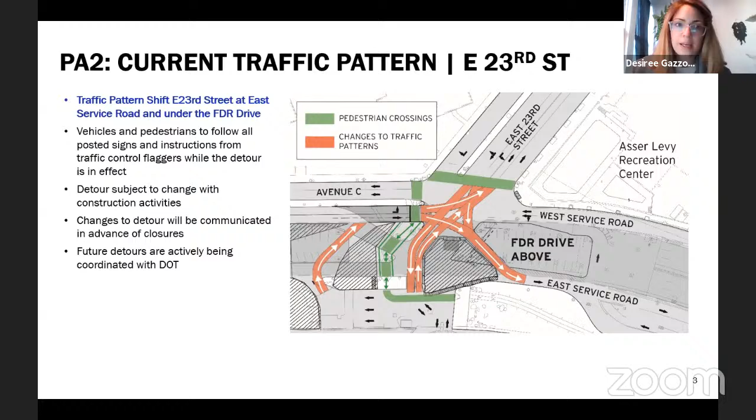So first, we just wanted to remind everybody, as of last week, the traffic pattern at East 23rd Street and Avenue C under the FDR Drive shifted. So the work has changed a little bit. I don't know if you've had a chance to drive or ride or walk down there, but again, please heed all signage that's there and the traffic folks that are helping assist pedestrians and vehicles. This will be in effect for several weeks, and then we will shift back to working on the south side of the intersection, and that will be about April 22nd.

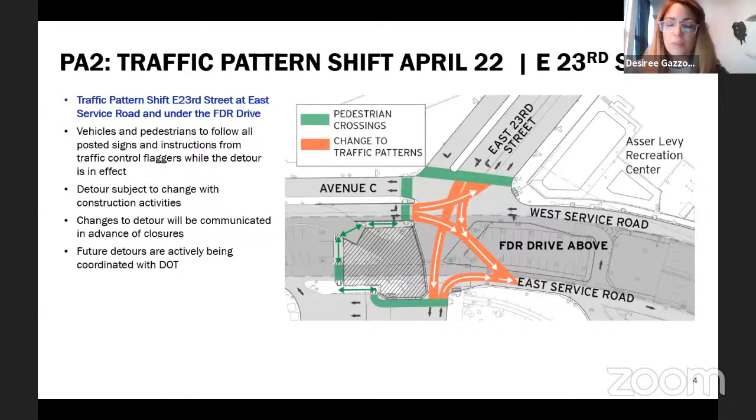We had an advisory go out that I believe said the shift was going to happen about a week earlier. New schedule discussions have provided us more information, and it looks like that shift will happen not until the week of April 22nd. Again, please reach out with any specific questions, but basically we just hope that everyone follows the signage in this intersection. It is a very complicated intersection to begin with, and the construction makes it a little bit more difficult. But we are coordinating with DOT on the signage. We have the traffic folks there to help pedestrians and vehicles. We ask that everyone, bikers, bicyclists, and vehicular traffic folks, pay attention to the folks trying to help move the traffic along.

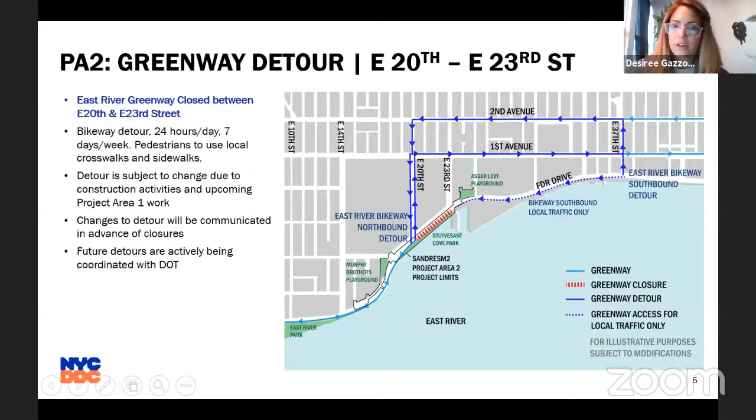So currently, bicyclists that are using, or when that Avenue C access comes online, folks can use Avenue C, connect on the Greenway here at this area, just at 18th Street, just before getting onto the detour access at 20th Street - that right Avenue C loop. So the question that had come up, and we understand there was a letter about it, was to look at this area under the FDR Drive between East 18th Street and East 23rd Street, which we have been doing in coordination with our DDC folks, DOT, and the contractor.

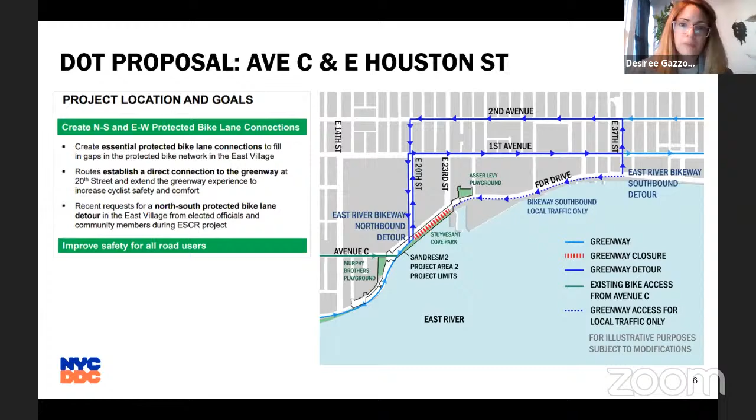Once the pile driving begins, which it is beginning this week, in the Solar One area, that area under the FDR Drive will also be heavily used for staging of equipment and materials, and then Avenue C will be more heavily used for the equipment for construction.

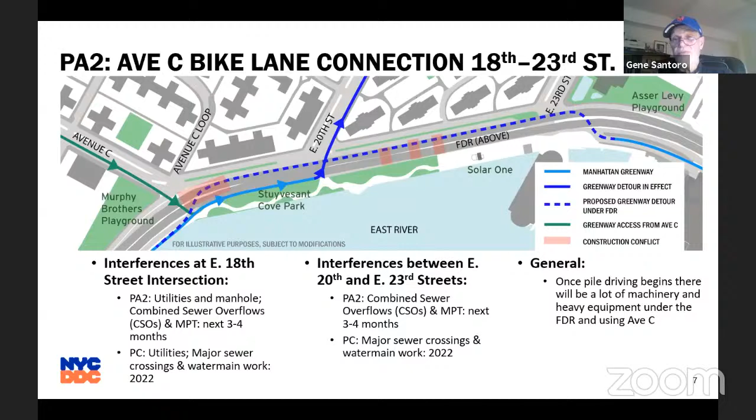I have a follow-up question about the transportation issue. I understand this map and what you're saying. I'll reiterate one more time: for all your planning, what I see is people riding their bikes and jogging in the street and on the sidewalk up Avenue C in traffic. So for all your signage and plans, it's not working. That's all I have to say, because I'm not Sisyphus — I'm not going to keep rolling this stone up the hill. We'll see what the casualties are as the season starts to ramp up.

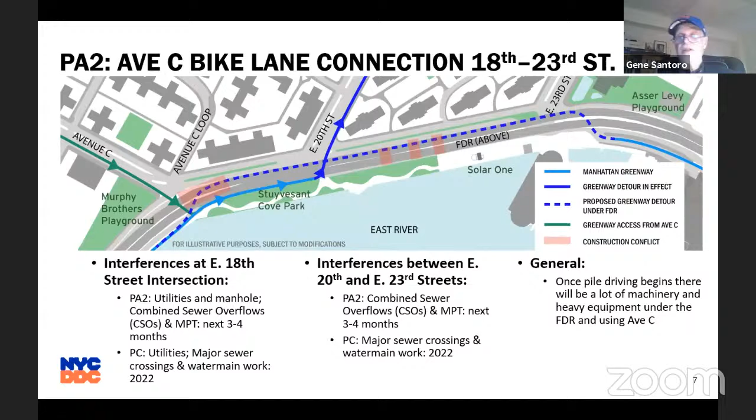Hey, Gene. Hi, Community Board 6. This is Jennifer Falk, I'm with the Union Square Partnership. Thank you for having us this evening. We know this has been a really difficult year for a lot of people, and we really appreciate the Community Board's time in hearing our agenda item this evening.

As more people are getting vaccinated and the weather's getting better, we're really looking forward to spring. I'm going to do a quick introduction, and then turn it over to my colleague, Ed Janoff, who will run through the presentation. I know I don't have to explain what a business improvement district is or who the Union Square Partnership is, but we've been around since 1976.

This particular project is the culmination of a robust amount of community outreach that we did in the 2018-2019 period. We reached out to over 1,000 stakeholders through large community forums, smaller pop-ups including in residential lobbies, and an online survey, and pulled together what we hope will be the framework for eventual project work that we do in the district.

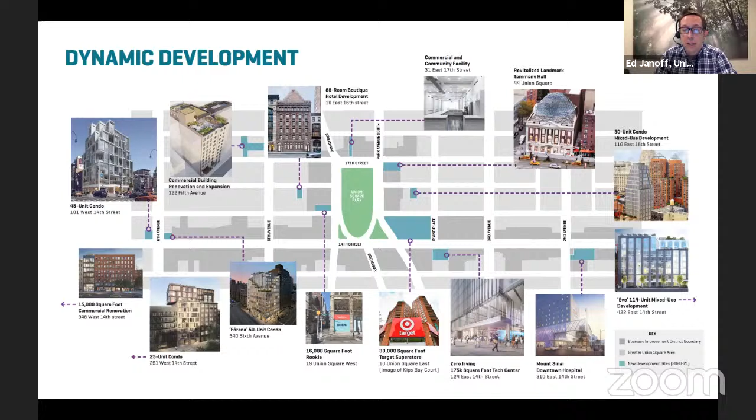All right, so I'm going to go through this material rather quickly. The vision plan is available on the website, but I'll leave plenty of time for questions at the end. This vision plan was started in 2018, at a time when the neighborhood was on a really strong positive trajectory in terms of foot traffic, mass transit use, and Citi Bike ridership nearly doubling year over year. That's a trajectory that, once COVID dissipates, we expect will continue, because there's a lot of strong investment coming into the neighborhood from the private sector — a Target coming into Zeckendorf Towers, the tech center opening next year, and a bunch of different mixed-use projects throughout the neighborhood.

The outreach portion of this vision plan development, as Jennifer said, was the most robust in the 40-year history of the partnership, with all kinds of different scales of engagement events — little pop-ups in the Green Market, in the lobbies of residential buildings, at subway stations, bus stops, etc.

We conducted a survey with thousands of different interactions to gather ideas about Union Square. I won't go through all the ideas, but open space and transportation were clearly two of the biggest things on people's minds.

We thought a lot about how Union Square as a neighborhood and public space is affected by the intersection of the pedestrianization, or future pedestrianization, of the Broadway corridor and the busway that was implemented—two DOT projects moving forward over the past few years.

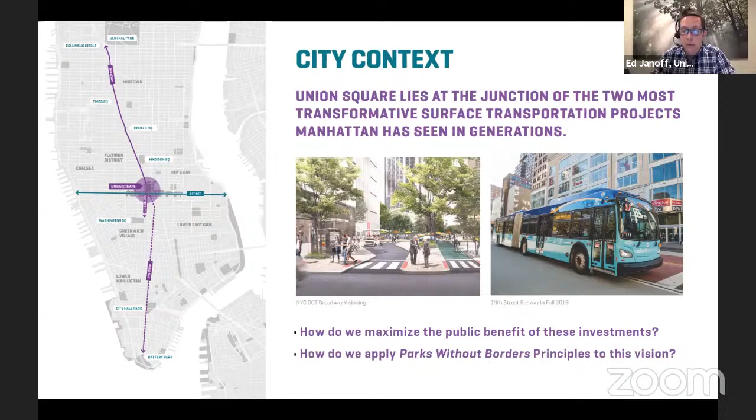We also thought a lot about the evolution of Union Square as a public space, from a gated oasis into more of an open square that is woven into the fabric of the neighborhood and integrated into daily use—starting from the Green Market to the DOT temporary work—and how we can advance that for the value and benefit of the neighborhood and the city.

So we created this vision statement, which is really about trying to make Union Square as a neighborhood and place as accessible and as inclusive as possible. There are a number of goals in the vision plan—soft goals that help drive the design thinking.

The design team, Marvel Architects, divided their ideas into five discrete projects to help organize our thinking in terms of funding and building.

The five projects are: Union Square West; the Broadway Gateway, where Broadway comes down into the square at 17th Street; 14th Street Boulevard, extending from First Avenue all the way to 6th Avenue; the Triangle Park at 4th Avenue and 14th Street, which from feedback seemed to need the most attention, along with the east side of the park in general; and fifth, the park in general, the central park area.

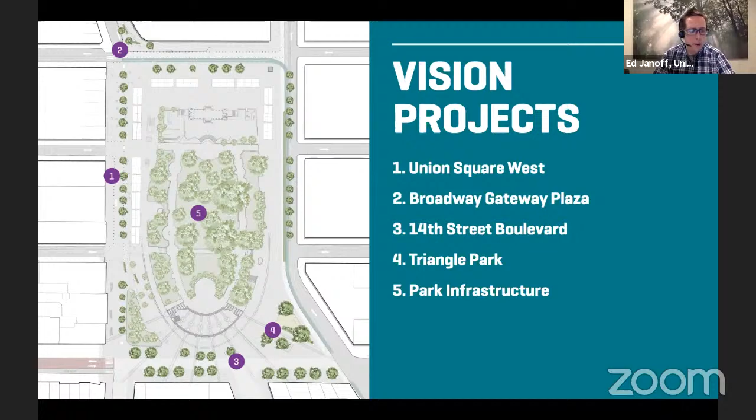Tali, I'm going to hand off to you. But basically, I'll start here to show you concepts that the design team created for these five different projects.

Basically, a lot of iterative, incremental changes have happened around the perimeter of the square over the last two to three decades. The overarching theme is: how can we make Union Square look and feel like one consistent, coherent space that is more friendly to pedestrians, more accessible, and supports bicycle and transit use?

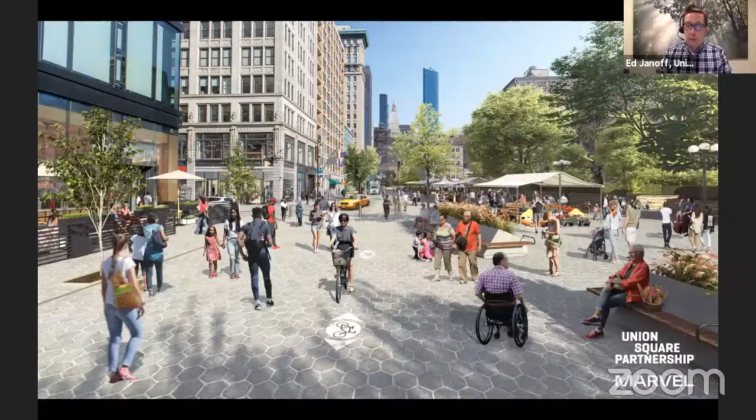Tali, are you with us? Hi, Ed, can you hear me? I'm having some technical difficulty. Yep, okay great—if it cuts out, please continue on.

Thank you, Ed, and thanks again to the committee for having us this evening. I'm going to quickly walk through a series of aspirational images that the design team created, which will illustrate the vision plan's five major projects.

As Ed mentioned, our goal is to create a unified design and palette that treats the space as an extension of Union Square Park. You can see in the after-image of Union Square West, there's a single paving material extended from Union Square Park out to the building edges.

Here the designers are showing hex pavers, which is a typical standard for New York City parks, but the idea is to create a seamless, unified look and feel. We believe this could be achieved using a variety of unified paving material.

Marvel designed these custom raised planters with seating components. There's also potential to include trees here—even though we may not be showing trees in all of the renders, we would like to increase the amount of trees where possible.

We're showing the Green Market extended down Union Square West with potentially new, unified canopies. There are retractable bollards to prevent through traffic, but these will allow emergency vehicles to access the buildings as needed.

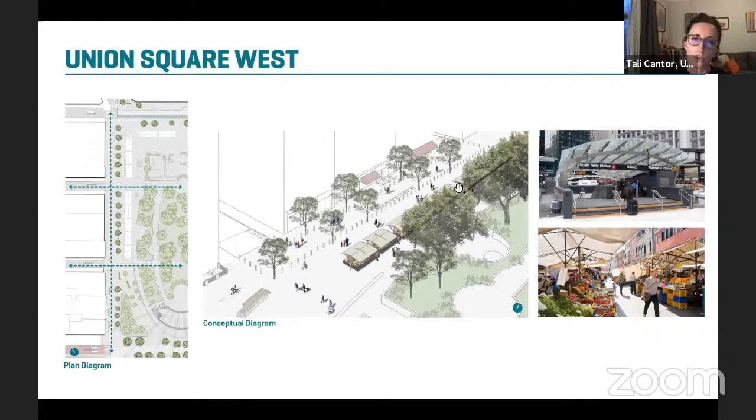Another view of Union Square West here. What we'd like to point out is the fact that the expansion of pedestrian realm along Union Square West provides an opportunity to create a renovated subway entrance at 16th Street and Union Square West that's ADA accessible. We would like to see an escalator and elevator at this end of the station, and believe it would significantly improve access to the northwest corner of the station and the square.

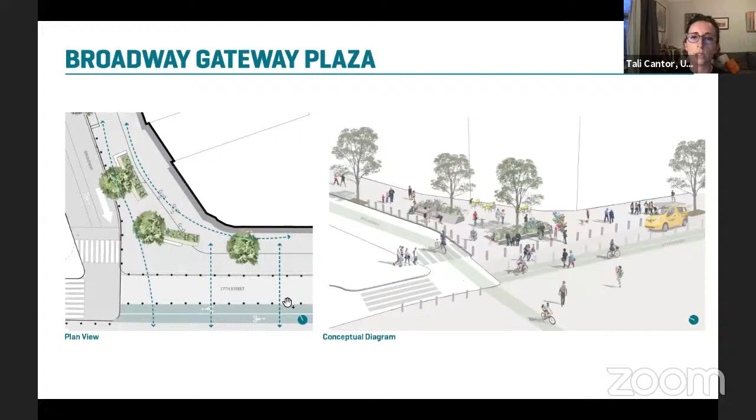Here's the plan and axon view. You can see that the design preserves bike access on Broadway and two-way bike lanes on 17th Street. 17th is treated as a shared street with continuous at-grade paving between the plaza and Union Square Park, and this street will allow for taxis or for-hire vehicles to access the street, but at reduced speeds.

So here's our vision for the 14th Street Boulevard. We're again looking to make these temporary materials permanent and unified with the larger design. The paving is extended from Union Square Park across 14th Street to the building edges. There are planter benches to provide additional seating and greenery, and these planters can also be used as roadway barriers to break up the row of bollards that would be required.

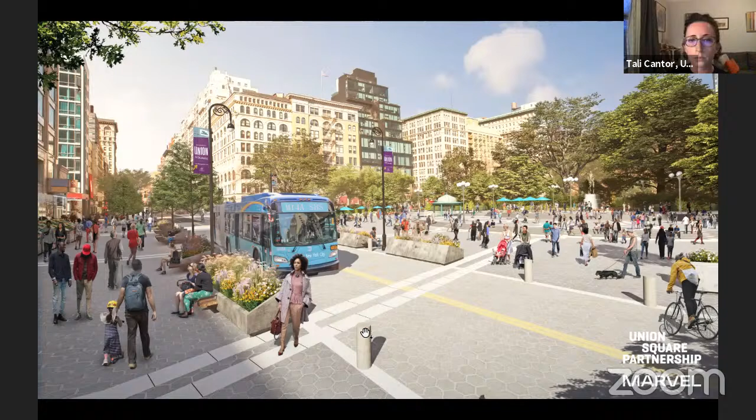We're essentially looking at doubling the width of the sidewalk, taking over the footprint of the current busway pedestrian zones. The goal here is to provide more breathing room on the block, which can get pretty congested, especially near the subway and retail entrances. In this view, you can also see that the treatment would be extended west to University Place as well.

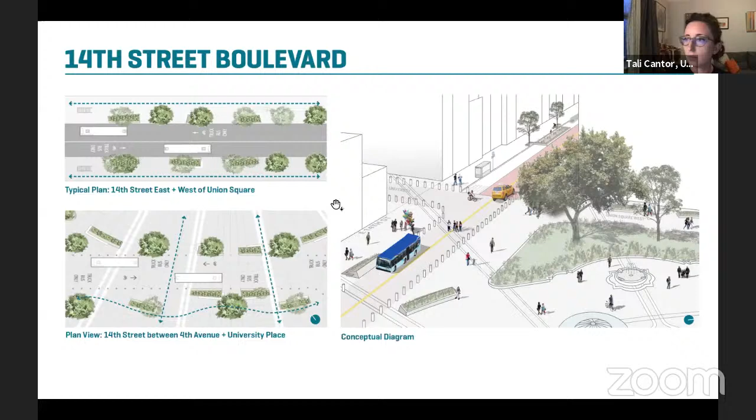Next, we're looking at Triangle Park, which is the island between 4th Avenue and Union Square East in the southeast corner of the park. We heard a lot from the community about the east side of the park and the conditions that exist there. Some of the issues are with visibility, poor circulation, and poor irrigation — it's difficult for plants to thrive, and it's detached from the main public space.

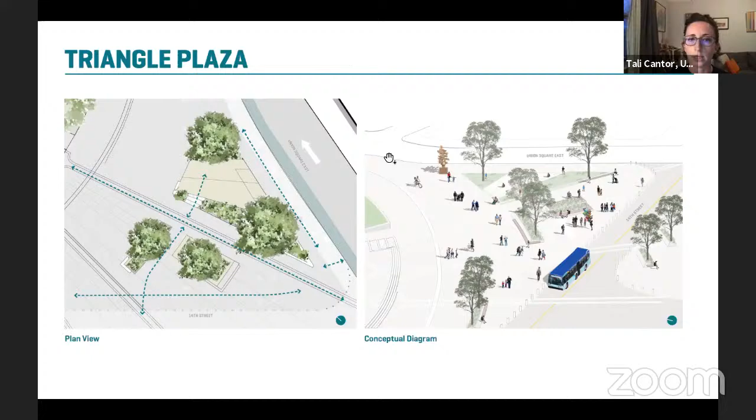The final project focuses on park infrastructure. This section identifies existing infrastructure throughout Union Square Park in need of upgrades, including a tree succession plan to preserve the existing canopy, renovating amenities such as bathrooms and the dog run, upgrading landscaping and pathways, lighting, utilities, and drainage. There's a lot of work and investment that we know needs to be made to maintain the basic infrastructure of the park, and that's why we're including it as a major project.

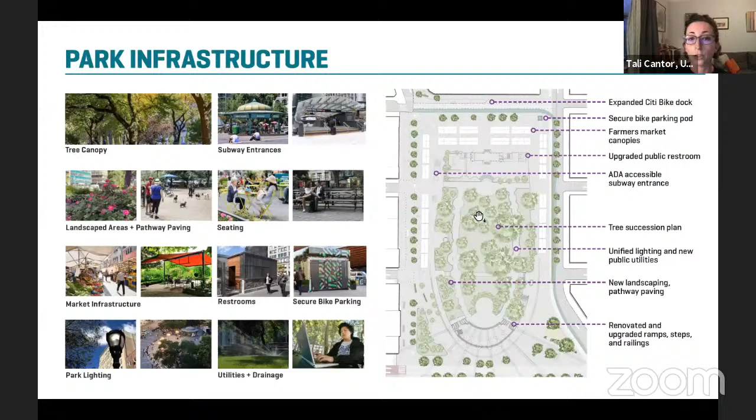Finally, in the vision plan, there is a streetscape toolkit. These are individual street furniture elements that are not site specific, but can be rolled out and implemented throughout the district. Outdoor seating is a big part of this. We wanted to preserve the great people watching opportunities that people love in Union Square.

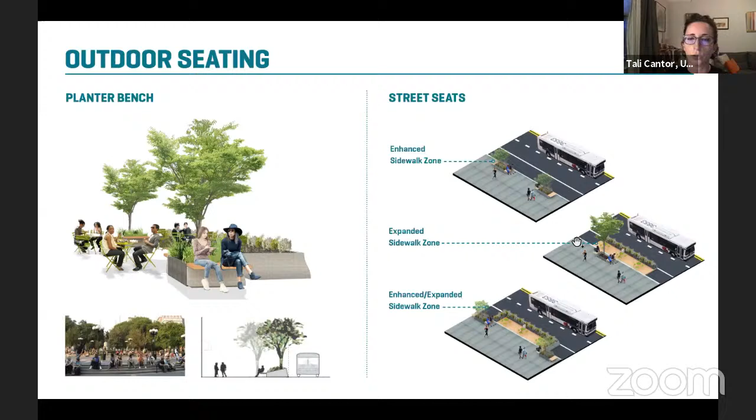Here we have Marvel's planter bench, which draws inspiration again from the experience of people watching on the South Plaza. Marvel also designed a concept for parklets on the right side. The city calls this street seats. The idea here is to create additional public spaces in the curb lane and incorporate existing tree pits to create these sort of mini parks along the streetscape.

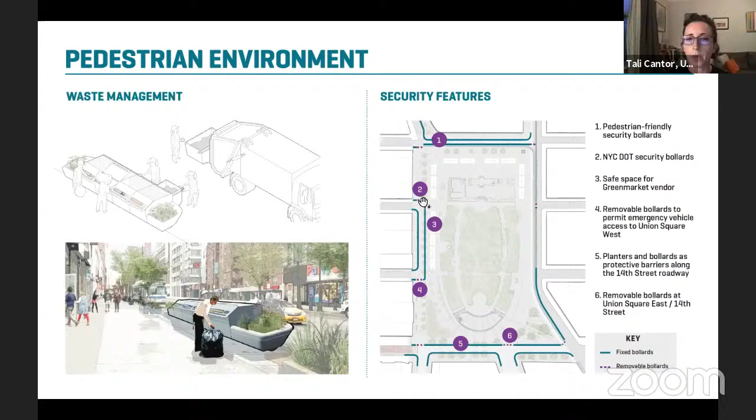They're also looking at ideas to consolidate commercial waste in containers that would be stored in the curb lane. The goal is to get trash off the sidewalk to again create a better pedestrian environment. Here we have a map of security areas where we would consider different types of barriers or bollards depending on the site and access needs.

We're also looking to do a lighting plan that will consider the interior of the park, streetscape, and building facades. We're emphasizing historic lighting, restoration of the pedestrian globes, current park lighting, facade uplighting to highlight some of the unique building features facing the park, and moonlighting from the surrounding buildings.

And lastly, public art. We have a few sites that are currently used for public art installations, but we feel because of the significant increase in public space, there could be several other sites that could be activated with artwork or other programming.

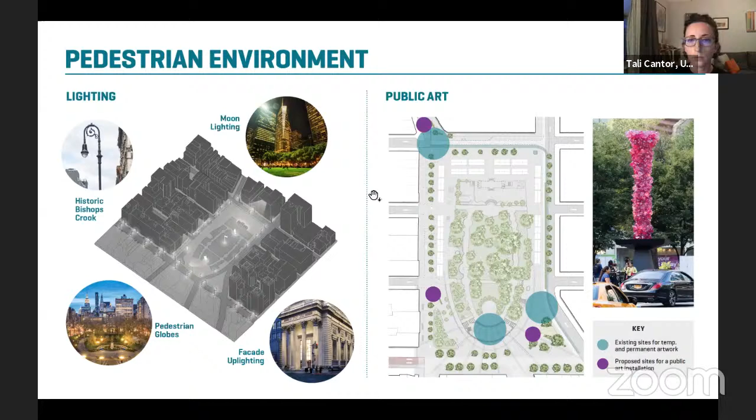So that was just an overview of the major projects and Streetscape Toolkit. I'll hand it back over to Ed to wrap up and walk you through next steps.

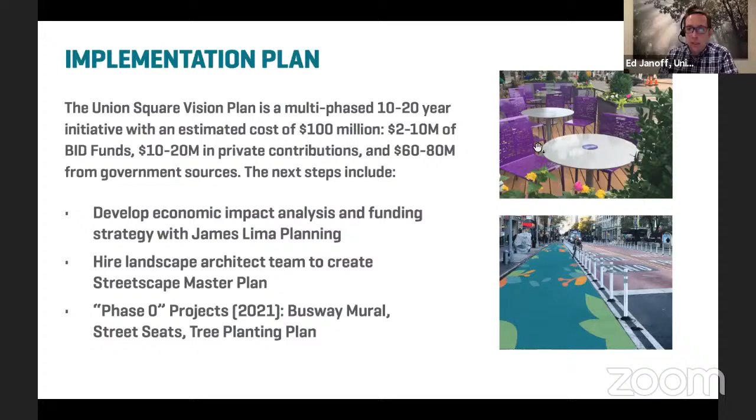And lastly, we're looking at doing some early action projects this year, including the idea of potentially painting parts of the busway where there's pedestrian space. This is not a proposal, just for reference. And then also the idea of doing some of these parklets that the design team came up with, installing them in some areas up and down 14th Street.

In terms of timeline, this is not when the plan is going to get built.

This is just rollout of the vision ideas. Right now, tonight is the 6th of, I think, 8 community presentations that we're doing to just hear everybody's feedback on these ideas. This is a master plan that is probably 10 to 20 years worth of work, so we're really at the very beginning now.

So we're really interested in hearing everybody's ideas, what people like and don't like and are concerned about. Some of the things that we've heard a lot about is people wanting to see potentially more greenery in some of the renderings. We've heard some questions, maybe some granular questions about traffic, which we're not quite ready to answer yet because it will require a more detailed network analysis. But these are the sorts of things that we're hearing from the community now, and really interested to hear what you all have to say.

I think most of all, we're really excited that people are appreciating the ambition of the plan and some of the specific pedestrian improvements. But again, looking at ways that we could be addressing ped, bike, and vehicle conflicts, and then different ways that we might be able to incorporate resiliency and sustainability into the vision. So that's some of what we've heard already, but really interested to hear what you guys might have in terms of questions tonight. So thank you.